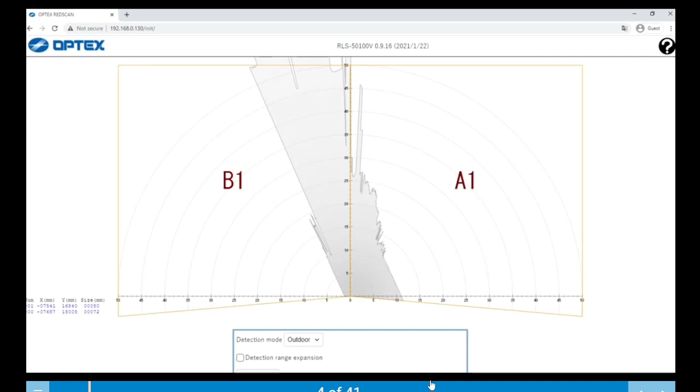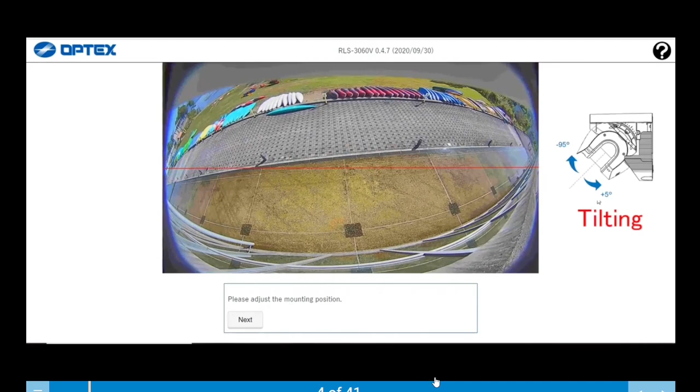Next, you should perform an area set. Once complete, we can see the detection area has been set. You can click Finish or click Go Back to make any changes.

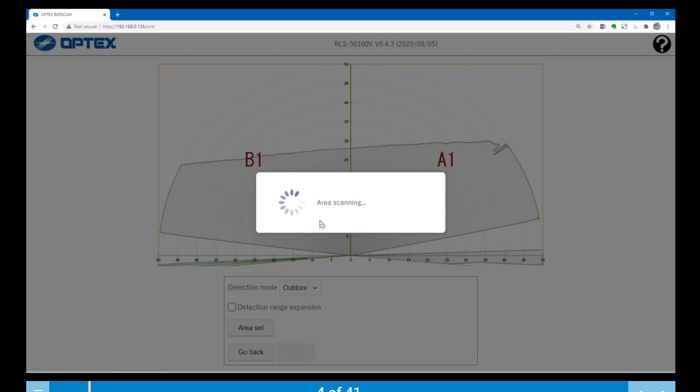Upon finishing, the detector will restart and accept the detection area. When the screen refreshes, you can see the Settings button in the bottom left. The initial configuration is complete, and it is time to move on to the device configuration.

This section focuses on the home screen and the various icons and buttons. On the top center section of the screen, you can see the model type, the firmware version, along with the date and the firmware release. In the top left corner, a series of buttons are available to manipulate the screen.

The light yellow box around the outside of the detection zone indicates the maximum sensing area capability of the RedScan Pro. The grey shaded area is the actual detection zone that has been created by the area set carried out in the initial configuration.

On the top right corner, you can see who is currently logged into the device and the help file. In the bottom left is the settings button that will be covered later in the training. In the bottom right, we have the current profile, a button to take a snapshot, a button to begin the recording, and one to go full screen.

Starting with the top left corner icons, the plus and the minus are there to zoom in and zoom out. The zooming can also be done using the mouse wheel instead of the plus and minus icons. You can move the map by dragging the mouse.

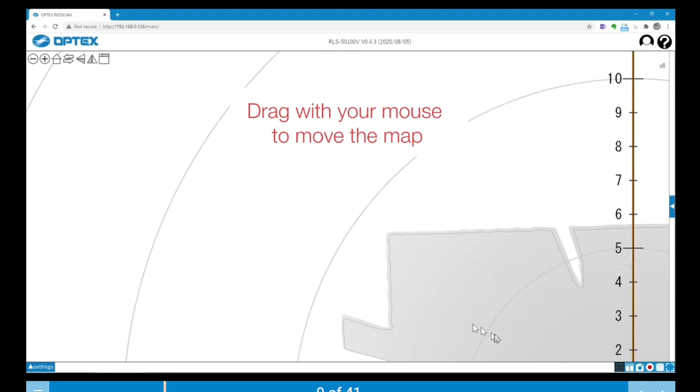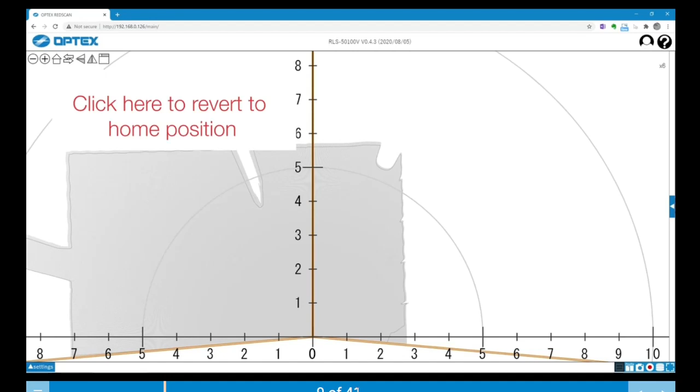The home icon takes you back to the home display. The two stack arrow buttons are there to switch between the home map and the assistant's camera view.

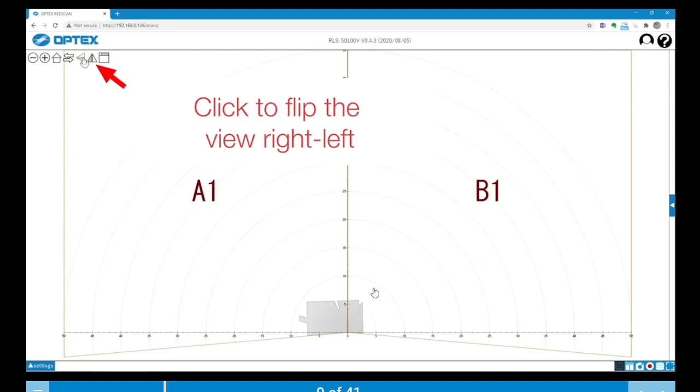The next icon is to flip the map upside down. The vertical triangle icon is to flip the map sideways left to right. The last icon on the top left is to open up a pop-up window enabling you to view simultaneously the assistant's camera and detection windows.

Now we will explore the status display. The status display bar is located on the right hand side of the screen. To open the bar, click on the blue arrow. Here you can see the current status of the input, the status of the 6 outputs, the current alarm status, and the event status code.

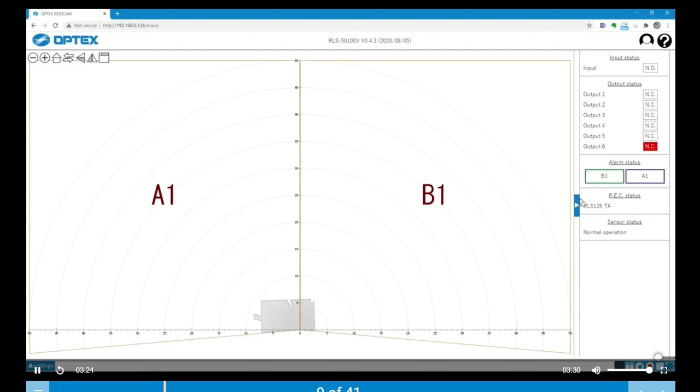The details shown on the bar will be covered in the tech training, where you can also see whether we are in normal operation or whether there is a fault with the detector. To close, click again on the blue arrow. In the bottom right, we have the current profile, a button to take a snapshot, a button to begin recording, and one to go full screen.

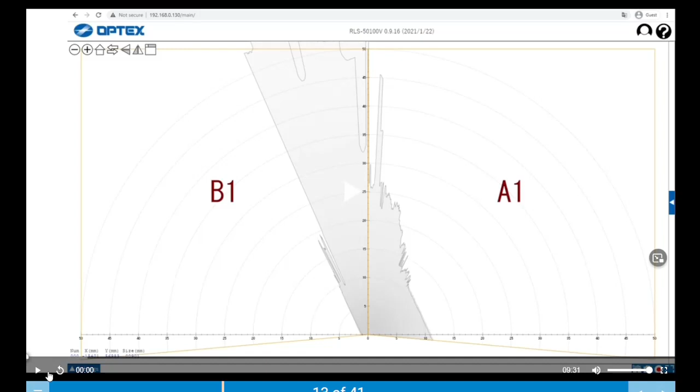This section is about device settings.

To access the settings menu, click on the blue settings button located at the bottom left corner. You are now in the settings menu, and the red save button on the right will enable you to save any changes to the settings on the RedScan Pro unit.

Now let's go through each button in the settings menu. To start, click Detection Range. The settings will appear on the right. Select indoor or outdoor depending on your requirements. Detection mode can be set vertical, horizontal or auto.

If required, the detection expansion mode can be activated here, but please consult with the Optex technical team before using this mode. Click Area Set to start the area set every time any parameters have been changed. Once done, click Save to apply any changes to the detector, then OK in the pop-up window. Finally, click OK on the confirmation pop-up.

The next section is Detection Profile 1. Click first on Detection Area, where you can input the detection ranges, height or depth, and the offset.

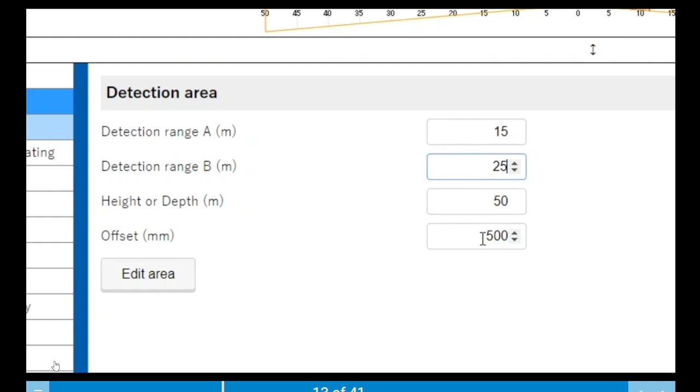Click on Edit Area to edit the detection area. In this part, you can use the crop tool to manually cut out areas from the detection range, and then the edit tool to adjust as required. In the restore section, you can revert to the last saved sensing area or reset to all sensing area.

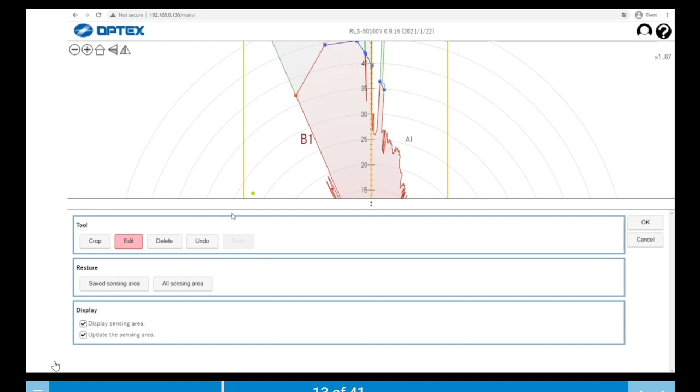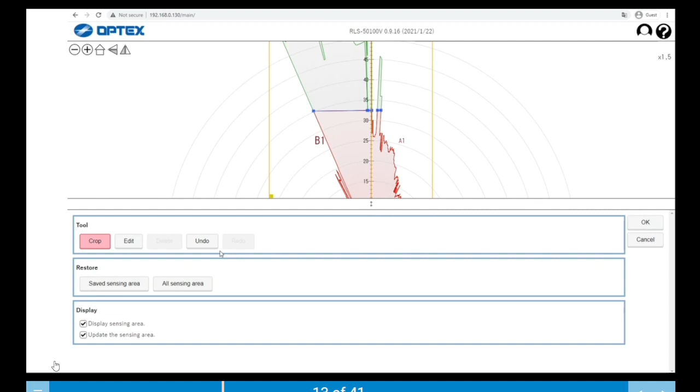In the display section, we can choose whether to display the sensing area or whether the sensing area updates live or not by placing the tick in the checkboxes.

In the next section, Area Masking Allocation, you can configure either masked areas or zone allocation. Once you have selected your choice, confirm by clicking OK on the pop-up window, then click Edit to open the configuration.

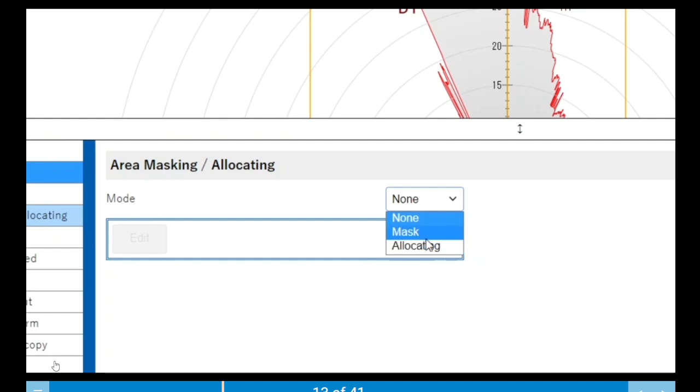For the masking, you can select areas that you wish to mask, for example, to avoid detecting unwanted objects in the area, by using the pen tool to select a single segment, or the rectangle tool to mask a larger area.

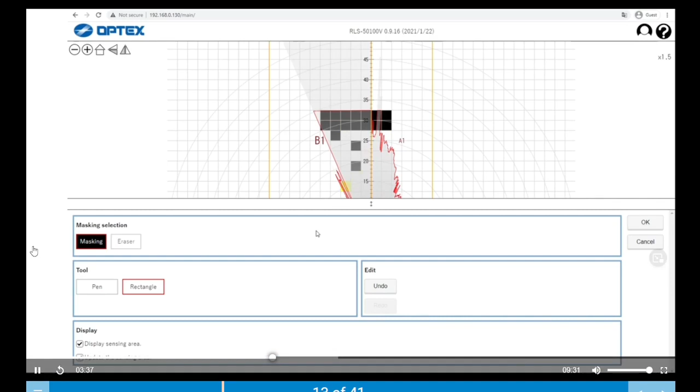The eraser tool can be used to delete segments. When done, click OK.

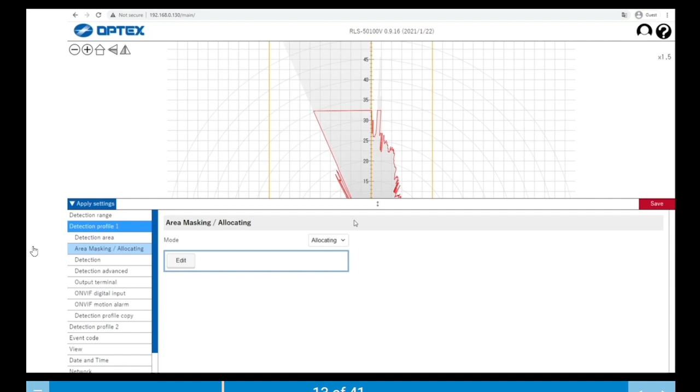For the allocation area, you can assign segments to zones A11 through B22 using the pen and rectangle tools as shown now on the screen. There is also an undo and redo function in the edit section. Click on the save button to apply these changes.

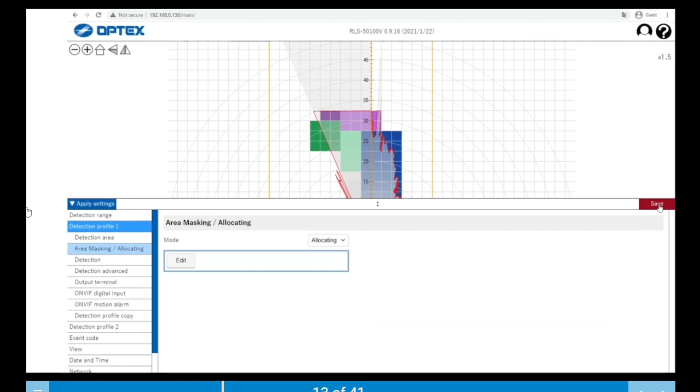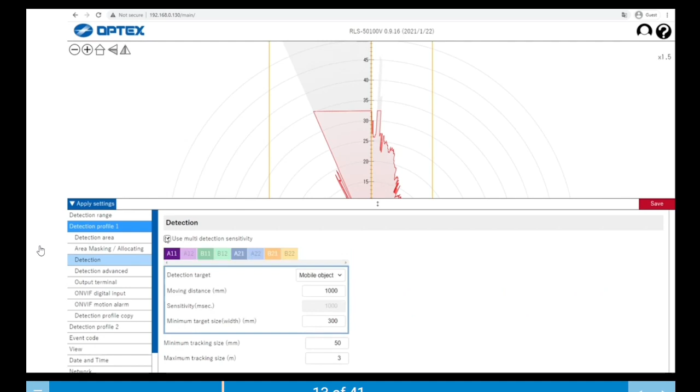Click Detection in the menu to be presented with detection parameters. If you tick the box marked Use Multi-Detection Sensitivity, you can set each zone's parameters individually. If left unchecked, the parameter changes are global.

You can modify detection target, moving distance, mobile object mode only, sensitivity, presence mode only, minimum target size, maximum target size, minimum tracking size, maximum tracking size, and the area to ignore from the ground, vertical mode only.

The next menu item is Detection Advanced, where you can adjust the parameters for non-detection zone measured from the detector, vertical mode only, environmental resistance, auto area adjustment, alarm duration, boundary recognition accuracy, and all of the trouble alarms.

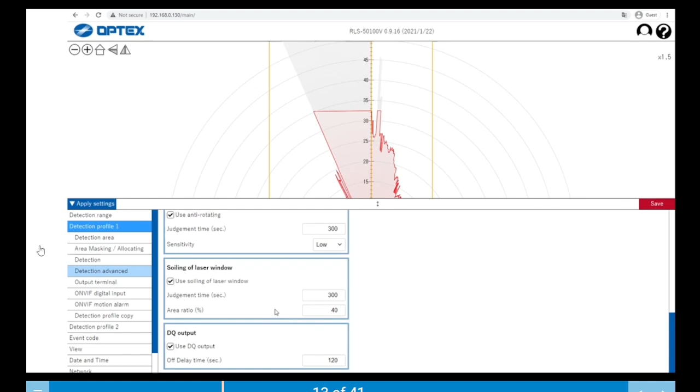The DQ, environmental disqualification output, is used to output an alarm signal in the event of a harsh environment such as fog, rain or snow for example, and should be used to alert the end user for the requirement to use additional detection methods when the RedScan cannot clearly define objects.

Output terminals. Here you can determine which events trigger each of the output terminals and whether they are in normally open or normally closed mode. Only configured alarm allocation zones will appear here. When you have finished allocating the output, click Save.

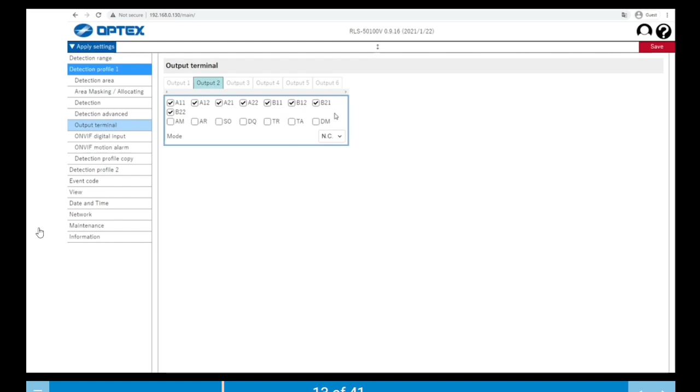Onvif digital inputs. Here you can either interlock these with the output configuration defined in the previous screen, or you can assign events to each as before.

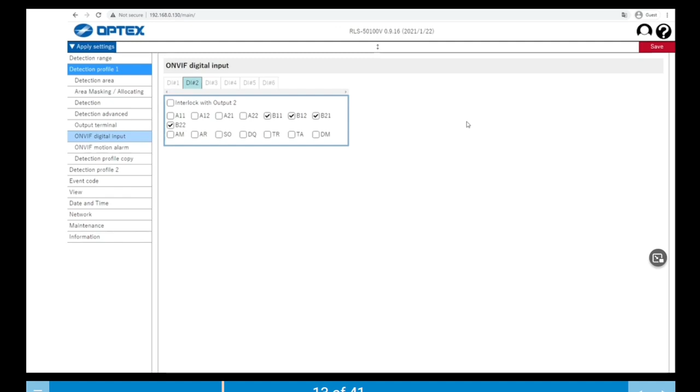In the next section, Onvif Motion Alarm, you can set the Onvif Motion Alarm to respond to the selected events.

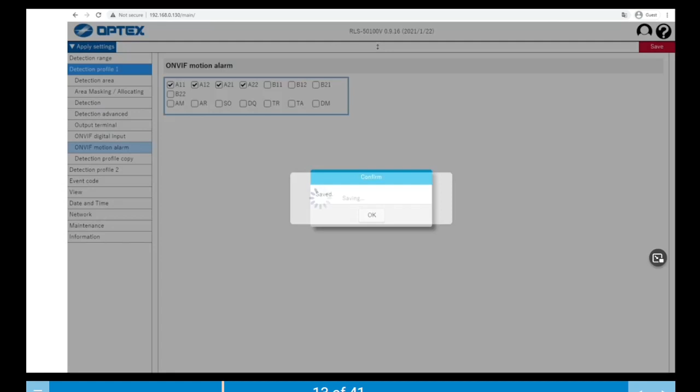The Detection Profile Copy allows us to copy the settings, or a selection of settings, from Profile 1 to Profile 2. Detection Profile 2 is configured the same way as Profile 1, and you can also copy settings from Profile 2 to Profile 1 if required.

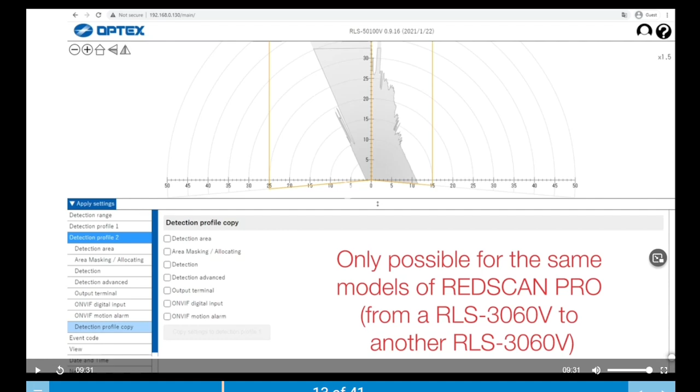We are now coming on to the Event Code menu item, where you can configure all the parameters for the IP alarm transmission. First of all, you should select the protocol: UDP, TCP, or both UDP and TCP. You can configure each section accordingly.

Starting with the UDP protocol, please select Broadcast or Unicast. Enter the IP address of the event code receiver, port number, and number of transmissions. Moving on to TCP, please enter the IP address of the event code receiver and port number.

ID: here you can determine whether the device ID is default, the last octet of the IP address of the unit, or a predefined unit ID. To configure the predefined unit ID, check the arbitrary detector ID.

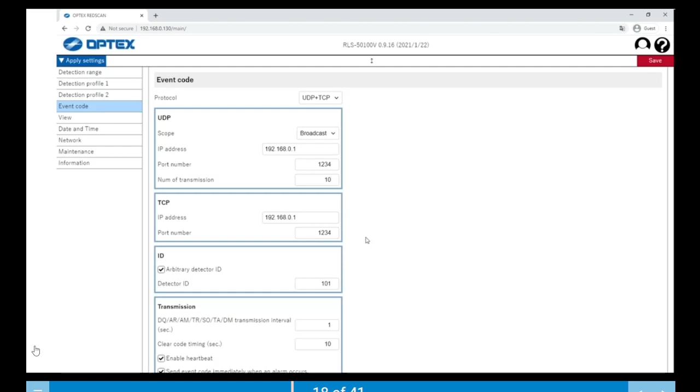Transmission: you can configure here the transmission interval for the trouble events, the clear code timing for when the trouble event is ended, enable the heartbeat for device monitoring, and whether to send the event immediately on alarm activation.

Click Save. Next, select the View menu item to set up the visual elements of the browser window. Laser: show the detection range, show the sensing area, show the detection area, show detected object information (red circles), show candidate object information (blue circles, not triggering an alarm).

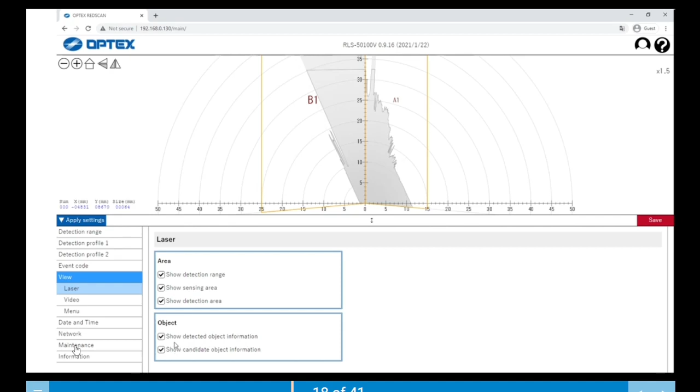Video: show text and a free text field for entering a name, show date, date format, show time, time format, show profile number, show event code, and the font characteristics. You can also select whether to display the laser line on the image and whether to show detected candidate object locations.

Menu: here you can choose the unit of measurement, metric or feet. There is also a checkbox for displaying advanced menus, which we will cover later in this training. Date and time section: you can set the time and date functions, such as time zones, NTP servers, and manual synchronization. When finished, save.

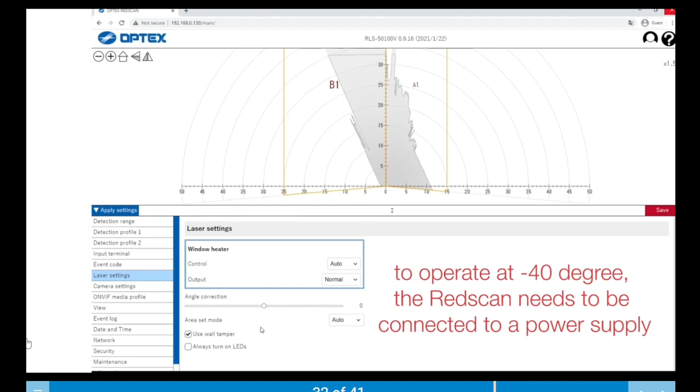In the laser settings, you can set up the window heater, providing the accessory has been installed on the unit, including the heater output level: low, normal, maximum, or high. Please be aware that to operate at minus 40 degrees, the unit needs to be powered via an external DC power supply. There is also an ability to adjust the laser angle by plus or minus 5 degrees.

You can also select the area set mode: auto, outdoor, or indoor. You can disable the wall tamper if not required, and you can set the LEDs on the RedScan to always be on or off.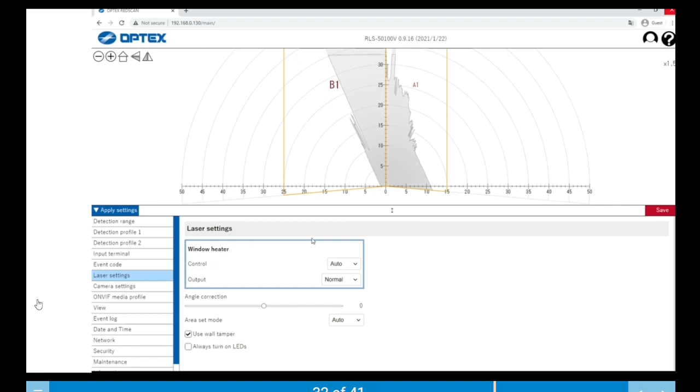Moving on to the camera settings, you can first adjust the image parameters of the assistance camera and select a distortion correction mode. Then you can select the day or night mode switch and decide whether or not to use the wide dynamic range function. The flicker correction should be set to the same frequency as the power line frequency from the initial configuration.

In the Privacy Mask menu, you can define up to 8 privacy areas of the camera view. You can draw and adapt the shapes to the area you wish to mask, as shown on the screen.

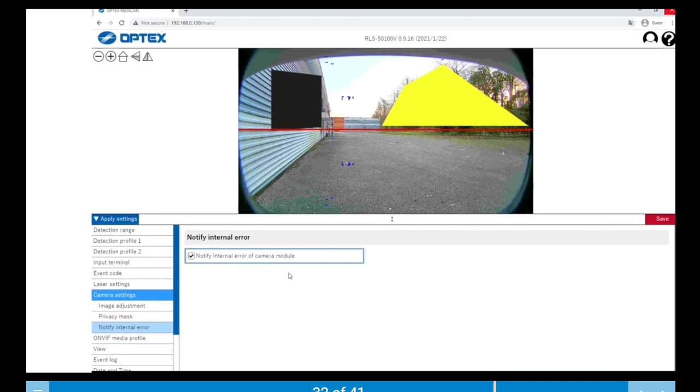The next menu we're going to look at is the ONVIF Media Profile, to configure the settings of the ONVIF video stream. You can select the video resolution, bitrate, frame rate, and GOP length. The encoding section allows you to configure the resolution, compression ratio, and frame rate.

The event log menu includes the record and play settings. For record, you can determine which events are recorded in the event log, and set pre- and post-alarm recording times. The play section allows you to search the event log, view the trigger action, and play back events returned by the search.

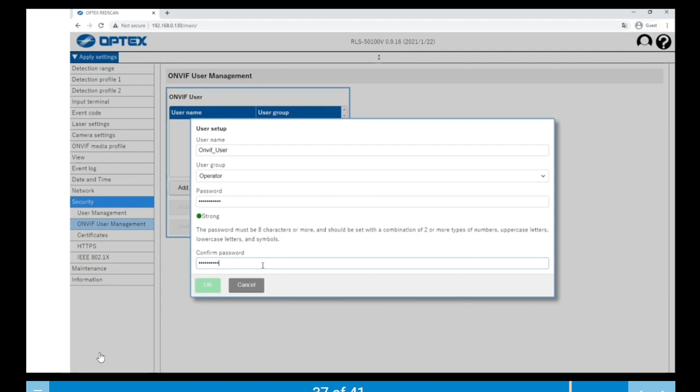Certificates: in this area you can install certificates, view the properties of existing certificates, delete certificates, create self-signed certificates, and finally create a certificate signing request.

HTTPS: you can determine whether connection to the device is via HTTP, HTTPS, or both. You can also select any certificates installed at the previous stage.

IEEE 802.1X: here you can enable the 802.1x feature. Once enabled, you can define the EAP type, PEAP-MSCHAP-V2 or EAP-TLS, along with the username and password, authentication server name, and any required certificates.

The full configuration of the RedScan Pro is now complete. Congratulations!